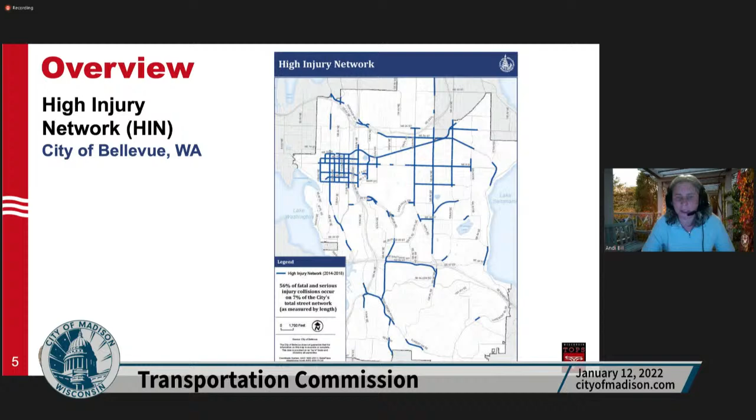There's another one, San Francisco, that looked at it. So with every great research project, we have to start with the literature review, right? We don't want to recreate the wheel. We want to make sure that we understand how the wheel has been working to this point, and if we need to improve upon it, or what we need to do with it.

So a lot of this work was just us analyzing what other areas were doing and seeing how we did it. One thing that San Francisco did was they combined intersections and segments together onto this map and looked at it.

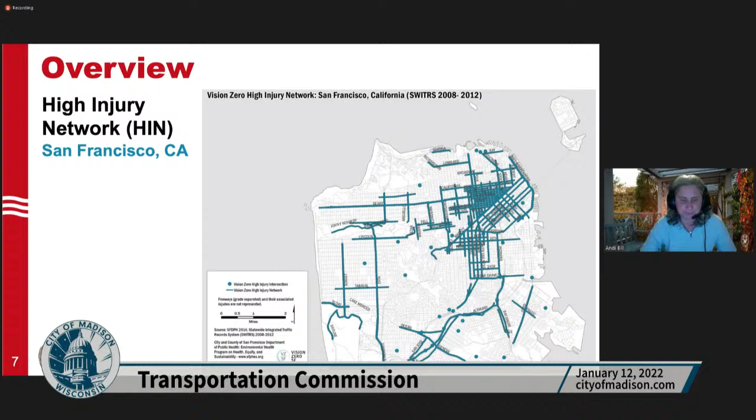As we think about our methodology, we couldn't have done this work without the City of Madison transportation staff helping us get the data. As always, your output is only as good as your input data, so we really wanted to make sure we had good data going into it. The City of Madison was amazing in getting us our network segmentations, which included over 4,500, almost 4,600 intersections, and 8,800 segments of roadway.

We also have our crash data collection. The Traffic Operations and Safety Laboratory houses the Wisconsin Department of Transportation crash database, so we have all crashes that occur within the state. We're obviously only looking at the City of Madison here, but the database goes back all the way to 1994. We looked at crash data collection for 2017 to 2019.

The intersections had a 250-foot buffer around them, just because sometimes how crash reports get filled out, the locations aren't always 100% correct. We kind of just move to different areas, so for the intersections we want to make sure we include a buffer around it.

For the segments, we looked at continuous mid-block roadway segments that are outside of that intersection buffer. So the roadway was either looked at as intersections or segments, and then we put the crash data on top of it.

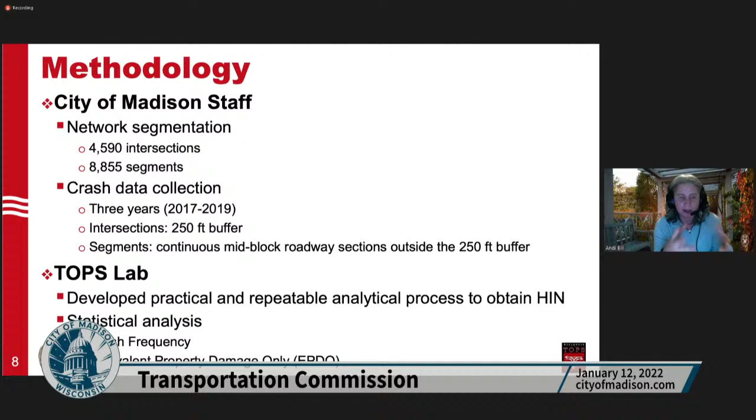As was mentioned, we wanted to make sure that we developed a practical and repeatable process to obtain the high injury network. It's no good to just have a network that sits on the shelf and doesn't get added to each year and looked at. So we took our time to develop this process in an Excel format and things of that sort, so that it can be handed over and done each year.

The statistical analysis has included crash frequency and what's called equivalent property damage only, and that's something I'll take a little bit of time to go into in our analysis.

At any point, if there are questions now or later, I can take them too. I'm kind of watching to see if there are hands that go up, but if someone else sees it, let me know. So you got to love a good graphic here.

Thinking about how we developed the City of Madison High Injury Network, we looked at our network segmentations. You can see the data elements we collected there in the yellow and green boxes. With that, we then added the crash data on that side, which is what I was talking about before.

We then looked at some crash frequencies, and our focus areas included all crashes, pedestrian and bicycle crashes or vulnerable road users, speed, alcohol, drugs, hit and run, and dark and light conditions—looking at whether it was lit or unlit, and different seasonalities with it.

We then take that crash frequency, and because we have a whole bunch of severities, we want to normalize those crash severities. So from there we go ahead and do what's called an equivalent property damage only. This normalizes it—it does weight the fatal and injury crashes up from the property damage only, but it gives everything one comparison value. I'll go into that in the next couple of slides.

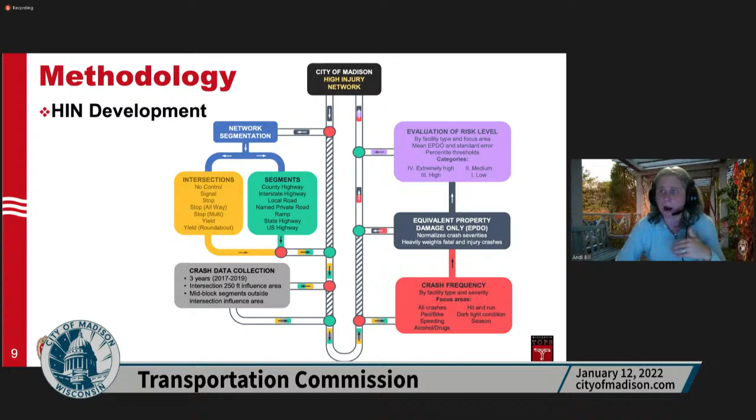From a crash frequency standpoint, we're just counting up the number of crashes over a period of analysis at our roadway facility—it's not normalized, just looking at that total number. For roadway segments, since the segments between our intersections can be various lengths, we normalize that to crashes per mile.

As we think about that EPDO, the equivalent property damage only factor, it uses a safety measure that allows fatal and injury crashes, which we're going to call KABC, because that's the injury severity used on our crash report forms. K stands for fatal, A stands for suspected serious injury, B is suspected minor injury, and C is possible injury.

And we normalize those to the property damage only crashes. So it's just a different way of normalizing it to make sure that we are including and really focusing on those fatal and high severity crashes.

We have a really neat way of thinking about things here in Wisconsin. We have what's called the CODES program, the Crash Outcome Data Evaluation Systems - because what would an engineer be without a couple more acronyms for you. We link our crash records to our hospital records, so we're actually able to get the crash costs of crashes here in Wisconsin. We're not using National Safety Council numbers or anything from a national standpoint - we're really using our Wisconsin numbers for that.

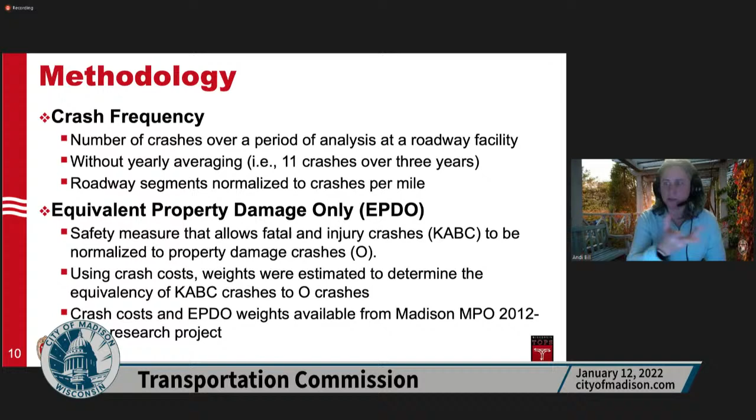So we did it by crash types. We looked at motor vehicles versus pedestrian crashes - those are called our PED crashes. We looked at motor vehicle to bicycle crashes - those are our bike crashes. And then our motor vehicle crashes, which could be a single vehicle or a multi-vehicle crash. So we broke it down into those three levels.

You can see the severity on the left-hand side of that table - that's coming from our law enforcement reported severity at the time of the crash. And then you can see the crash costs, which come from the hospital records, from that CODES data. What we do here is take this vehicle property damage only number, $24,322, and that's our base level, our 1. Then we take these other numbers and divide by that, and that gets us our weights on this side.

You might be looking at those weights and thinking, Andi, wait a second - how does a vehicle crash have a higher weight than ped and bike crashes? Unfortunately, some of this is that our vulnerable road users are going to sustain a very serious injury, or unfortunately a fatality, right at the scene of the crash. So they might not have those long-term hospital costs associated, as some of our motor vehicle fatality crashes do. That takes some of that into consideration, so it's sometimes a little hard to see those differences.

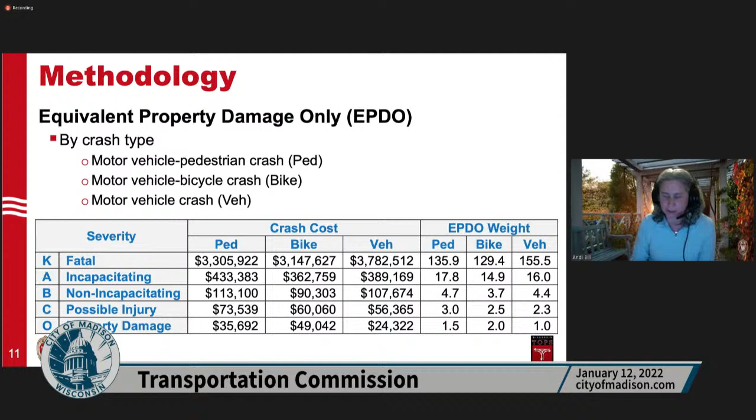This is just a way, instead of dealing with these large numbers for crash costs, of doing that weighting. So this is one example: one vehicle crash with an incapacitating injury is equivalent to what we call 16 vehicle crashes with property damage only. So one crash is equated to 16 of those property damage only crashes. Same thing with a PED with a fatal injury - it's equivalent to 136 vehicle crashes with property damage only. So that's kind of where those methodologies and weightings come from.

From here, and again I won't bore you guys with all the statistical models - if anybody wants to talk about them afterwards, Yang and Renee know how to get a hold of me. I love talking about statistical models, but I won't do that today during this meeting. We go through the models and then we come up with the network associated with it. This is an example of the bicycle crash - so we do a safety analysis of those intersections and segments based on those weights that we have.

So we're looking at those crashes, looking at what those weights would be, adding those weights to it. We looked at locations with an EPDO higher than a threshold, and what we picked for this one was a 65th percentile threshold. As you could see from some of the other jurisdictions that we did analysis with, anywhere from 50 to 85, and we picked 65, right in the middle.

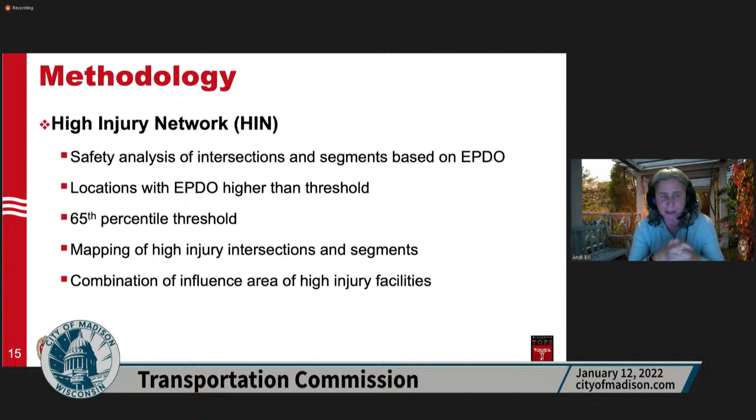Then we did a mapping of high injury intersections and segments, a combination of influence areas on the high injury facilities as well. So we did the analysis, and turned it back over to the City of Madison, which put together a beautiful draft high injury network map for us at this point in time.

I don't necessarily want to get into looking right at the details of each and every intersection at this point in time, but just wanted to walk you through our methodology. It's data driven, based on the literature that's out there. We really wanted to make sure we used a high statistical significance modeling standpoint that could be repeatable and used from year to year to come up with this high injury network.

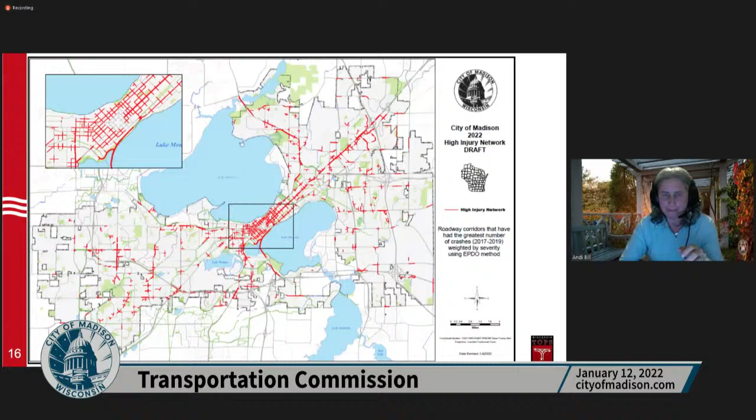Okay, what questions do you have for Andi or for Yang or Renee?

Harald, go ahead. Yeah, thanks for presenting this. As Yang said, we've seen this in various forms a couple of times, and so it's really nice to see how it has developed and get some of the methodological detail. So I do have some follow-up questions about these details. Let's maybe start with a straightforward one. So you say 65th percentile is the cutoff, the threshold that you picked, and that's the percentile of what?

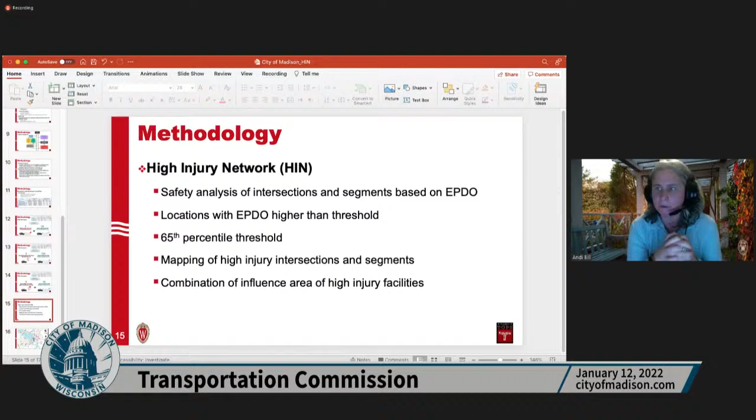Yeah, great question. So we looked at the network in general, and then looked to see the distribution of the weights for each of that network. And then we looked to say, okay, based on the weights, 65% of the segments were lower than that, and then we mapped the higher ones on that. So if you think about the distribution of the network with the different weights, we said, okay, let's look at the 65% and above to map it. Does that answer your question? So of any segment, no matter whether there was a crash there or not, right?

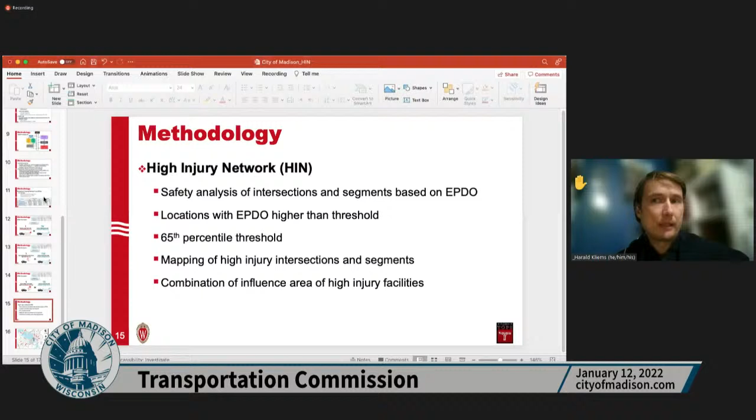Okay, thanks, that's helpful. So that leads me into the next question regarding the EPDO model. Can you say something about, it makes a lot of sense how that system works, that a property damage only crash, if you look at the multipliers, it's not terribly likely to show up on the high injury network map. But specifically, we talk about the high injury network and not the high crash network. So do you know if any locations that just have a high number of property damage only crashes actually made it into the map?

That's an excellent question, Harald, that I don't necessarily know off the top of my head, but I can look into it and then get some information back through Renee and Yang to you on that.

That's a great question. Because conceptually, I think I would be somewhat uncomfortable, because we've had discussions here at the Transportation Commission that certain treatments might lead to an increase in crashes, which might lead to an increase in property damage, but they prevent fatal and serious crashes, which is very much what Vision Zero is all about. I think ensuring that the methodology matches that approach would be really important.

Great point. Yeah, so we'll check and we'll get that information back to the group.

Okay, thanks. Maybe getting a little more specific, but related to my earlier questions. Looking at the map, I was wondering which intersections and segments show up there. For example, Mendota Drive, a low traffic road with generally low speed, still made that cutoff. So I went to Community Maps and looked up what that crash was, and it seems like it was an injury crash with a B level severity, which I guess is the second level, not incapacitating, but the one below. And that was the only crash at that intersection.

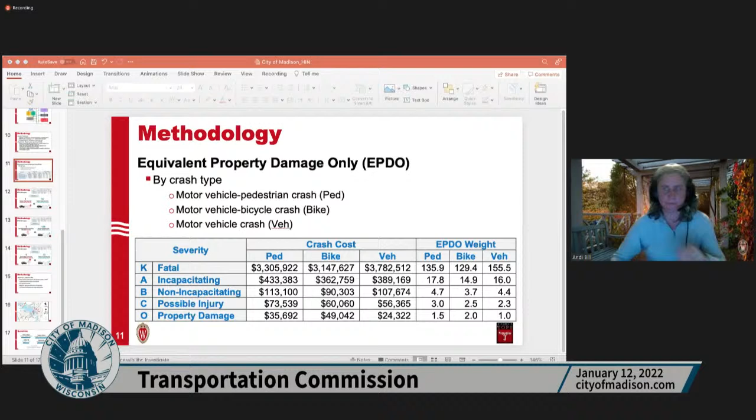Sure, and Yang, you can jump in too, but obviously we've been using the high injury network to help us with looking at project locations, and helping us as one of the data points in the Safe Streets Madison plan. We were using it previously for Vision Zero, and it's in the action plan to help us moving forward and making the best possible decisions.

Yeah, and I think that's partly why my question is going there. Does it make sense, for example, with Safe Streets Madison, to prioritize a project where there was a single crash over 3 years? Should that happen, because being on the high injury network gives your project a pretty high number of points, and I'm not feeling super comfortable with that.

Yeah, I just want to add that these are really good points. Our city isn't that big, but it's not that small either, and as Andi kind of presented, we have thousands of intersections and thousands of segments, so you're going to find some outliers that may not fit into any structure very well. That probably should be expected. Renee talked generally about how we use the tool, this is a tool that we use, so it's not everything we refer to when we prioritize our investments. With that said, this is going to be very valuable, so we can have some big picture ideas on the safety situations in the city, especially on fatalities and injuries, and the general idea on where we should focus our resources.

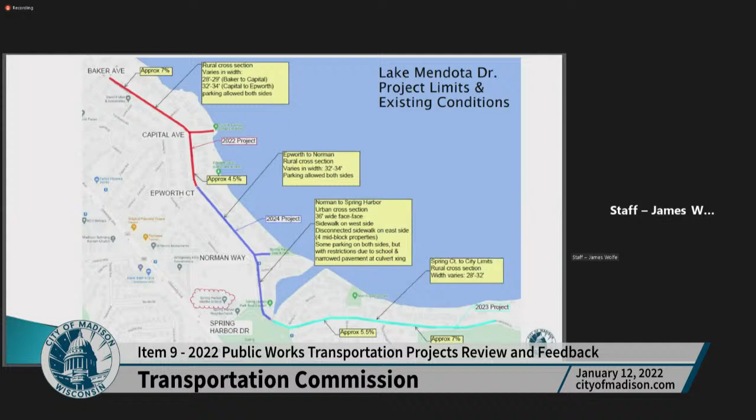For the most part, we do have parking allowed on both sides of the street. There is some parking restrictions around the school and through this area where the pavement narrows a little bit for the culvert crossing. I also noted a couple of the steeper portions.

There's a high point around Merrill Springs here, 7% grade, and a 5.5% grade coming down towards Spring Harbor. And then up on the westerly end, a 7% grade and 4.5% grade here, kind of in the middle near Epworth Court.

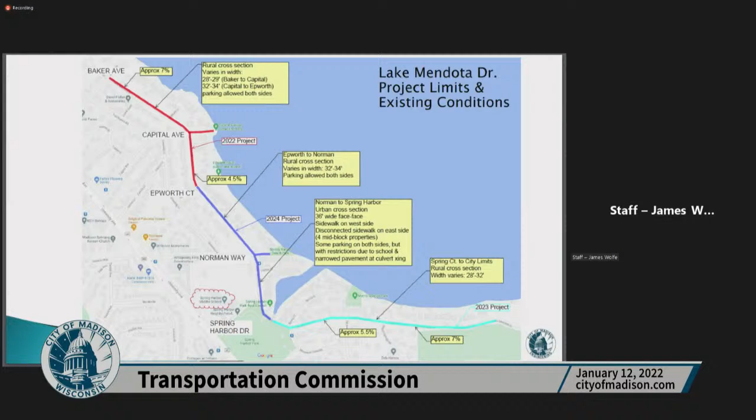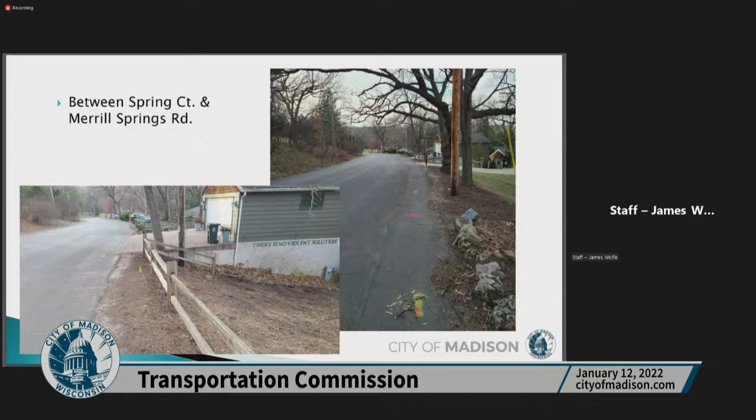And then here's the easternmost portion. It's tough to see, but you can kind of see there's a little wall that goes along this driveway, and it kind of dives down from the pavement edge. And this driveway is also fairly steep. I think this is at about 15% coming up from the roadway. Wooded area on the right side.

You can see some of the off-street parking areas that have kind of been created along with Lake Mendota Drive on this stretch, and some pretty lovely pavement here right in the center.

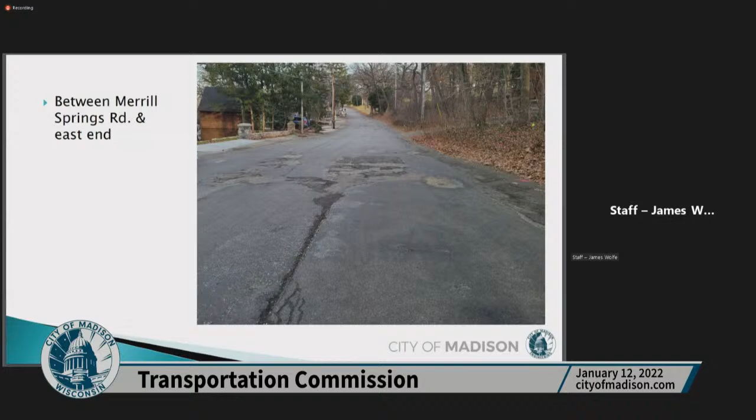So a little bit of information. I'm actually going to provide an updated slide here. The one that was attached is based on our tube counts for the traffic volumes and speed data.

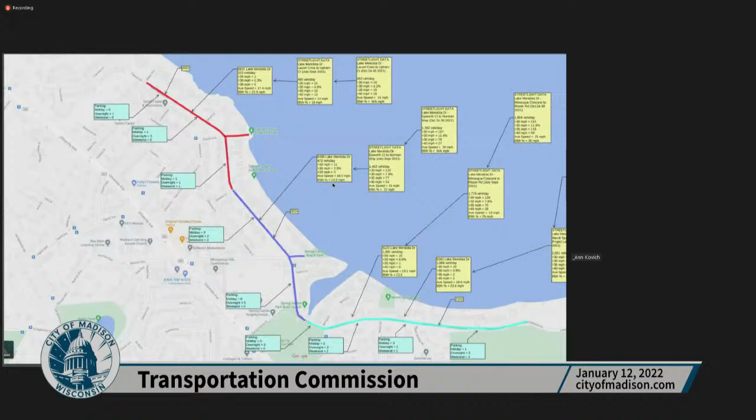Hopefully I don't lose you. One quick sec. Of course, my Zoom is blocking. Here we go. You still seeing my screen? Yes. Okay, great. So I'm going to zoom in, hopefully, on some of these. It's not letting me, unfortunately.

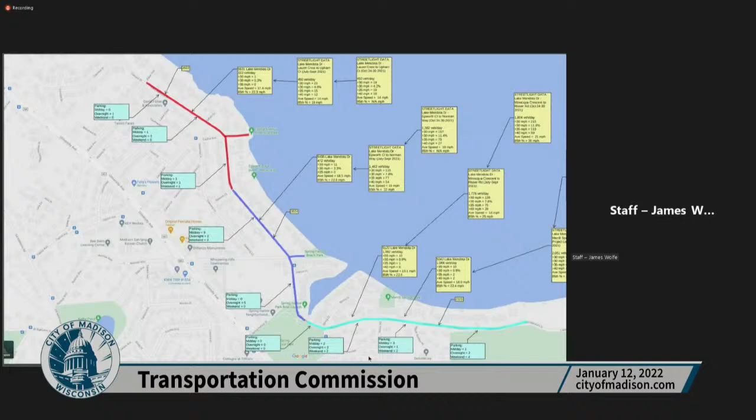But on the westerly end, so that we have some parking data in blue, where I'm going to try to bring this in, find another one. Here we go. So we have collected some parking data along Lake Mendota Drive. This was done over weekdays, daytime, evening time, and nighttime.

In general, we found pretty low utilization, maybe around 10% or so of the available on-street parking out there.

The volume and speed data that we've noted here - this first box is what was attached initially, and we've researched a little bit more data out of Streetlight this afternoon right before the meeting. Unfortunately, we weren't able to get that in there quick enough, but I still wanted that available tonight. On the westerly end, this is the lowest volume area.

Our tube counts had about 323 vehicles with average speed 17 miles per hour, 85th percentile 22. The streetlight data actually had a fair bit more traffic volume, up to 450, and a fair number of higher speeds out here too. We think this is probably a little bit more consistent with what we've heard from the neighborhood in terms of some of the concerns about speeds out here too.

The middle section, we had counted 472 vehicles. The streetlight data had considerably more, up to maybe around 1,400 or so. Similarly, the streetlight data had reported higher speeds in this area too. We had noted about 2.3% over 30 miles per hour, but the streetlight data was looking at closer to 7%. And during the fall, this was the same week that we had collected our speed data - they had about 11% actually.

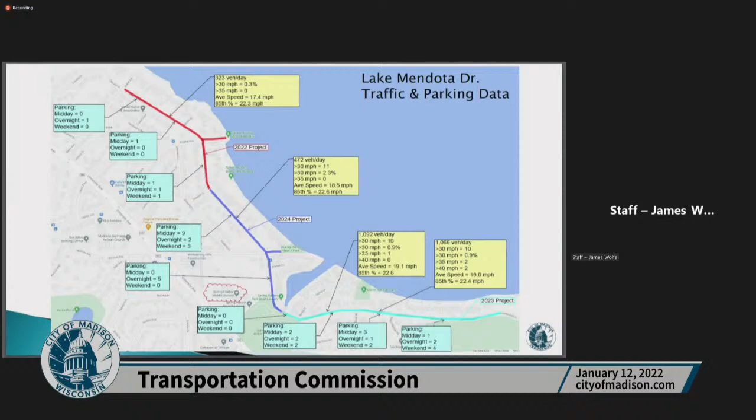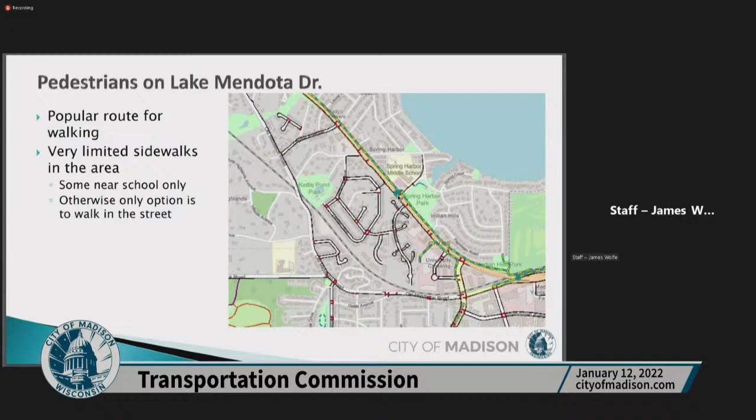Just a quick overview of pedestrians on Lake Mendota Drive. Like I mentioned earlier, there are very limited sidewalks in the area. We have the multi-use path along University Avenue, but in general, everything on the north side here has no sidewalks. South of University Avenue, we do have sidewalks - all these black lines scattered throughout the neighborhood. And I think you've already heard about a future underpass of the railroad at Old Middleton and Craig, and there is an existing underpass at University Avenue at Spring Harbor right here.

So our initial design concepts - this is why we're coming to the commission tonight - is to get some initial input as we start to put together our preliminary designs. We do think there is some flexibility to potentially narrow the street a bit. It is pretty variable and does seem pretty wide in some areas, especially in locations where there have been some extra paving or street use for on/off-street parking. Narrowing the street would provide some additional space to hopefully provide sidewalks in this area.

The eastern portion, from about Spring Harbor to the city village limits, is noted in the comprehensive plan as a tier 1 sidewalk need. But with some of the connections that Lake Mendota Drive provides to the school, overall pedestrian network connections, and some of the parks in the area too, we think it would be a good idea to propose a project that included sidewalks along Lake Mendota Drive also, to provide that all ages and abilities type pedestrian facility here too.

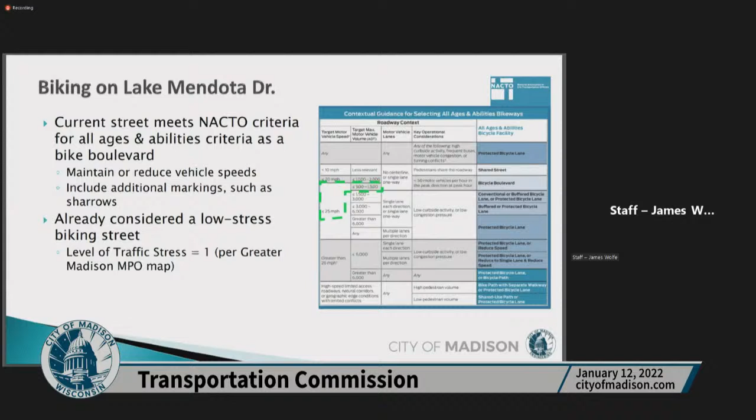With some of the input we've received from the neighborhood, we would also consider some traffic calming measures to help keep speeds down, especially in light of that streetlight data, where it does indicate there seems to be a little bit more of a speeding issue out there than the city collected data first.

Jim, did you want to advance your slide?

I think you might be talking about the last slide. Are you seeing it? We are now. I was looking at it on my screen, but apparently it was.

We do think that with how poor the pavement is out there in some areas, that's probably helping to keep speeds down to a certain extent. If we reconstruct this street and provide a new paving surface, we could see speeds increase a little bit out there potentially. I did note already that one concept would be to install and extend sidewalks to the extent possible, noting that we have some topography challenges in a lot of areas, and we would certainly hope to protect a lot of that tree canopy that's out there.

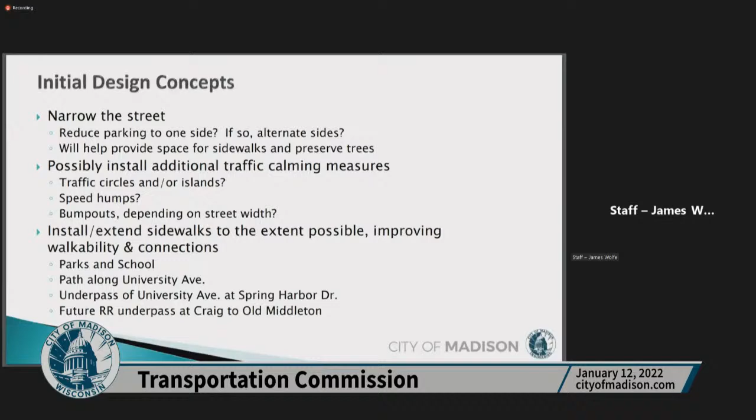While we do have additional right-of-way space that goes beyond what's out there for the pavement surface on Lake Mendota Drive right now, not all of that would be fully utilized if we are protecting some of those trees and taking into consideration some of the grade issues there as well. I think that is my entire presentation.

So what you're really looking for from the commission, just to clarify, is initial input for these preliminary designs. Is that correct, Jim? Correct. We're looking to collect some input from the neighborhood. We had a public meeting last night, and we've put out a survey where we've gotten some input on this. We'd also like the commission's thoughts as we prepare a preliminary design, especially on the idea of narrowing the street a bit and including sidewalks as key factors, and get thoughts on what potential traffic calming measures we should focus on out here.

Okay, Joe, could you ask if we have anyone from the public here to speak on Lake Mendota Drive? If so, we'll hear from them now. First up, we have Faith Fitzpatrick, who lives on Spring Court in Madison. Go ahead, Faith, you have 3 minutes. Okay, thank you.

I think these comments are fitting for this initial design. This is the first time I've attended a Transportation Commission meeting. I was at the public meeting last night as well. I wanted to give a little context for this stretch of Lake Mendota Drive that has reconstruction plans in the works. It was not only part of the historic Park and Pleasure Drive, but it was also the destination point, and we are lucky to still have glimpses of why it was that.

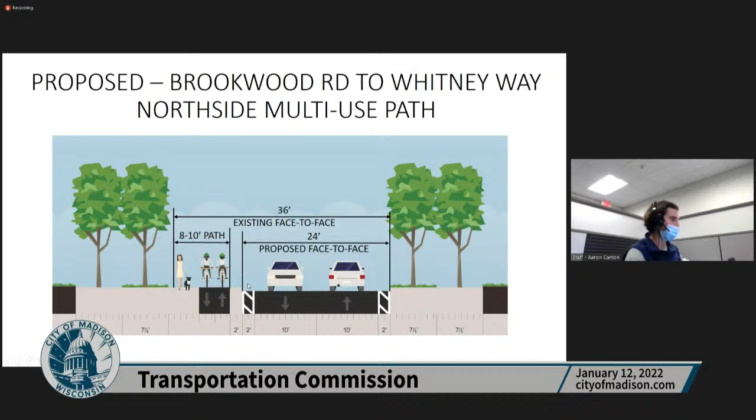So with that in mind, we also looked at an alternative where we would remove parking on both sides, bring in the curb line on the north side, and construct an off-street multi-use path that would ideally be 10 feet, but potentially vary between 8 and 10 feet. There would be a small terrace in between the path and the street, but this would be plowed and maintained by the city, so the city would be able to handle snow removal even with a narrower terrace. We would certainly work to keep as wide a terrace as possible while also minimizing our impacts to the trees and grading on either side.

We, after reviewing, believe this is our preferred cross-section due to the fact that there would be no additional assessments for sidewalk. There would still be assessments for utility work and some street infrastructure, but none for sidewalk. The path would be paid for and maintained by the city.

So with that, we can also look at the next larger section of Hammersley, from Whitney Way to the Beltline. Here's the existing cross-section, a little bit wider here, 40 feet from face of curb to face of curb, two-way traffic, parking only on the north side, and on-street bike lanes both directions, with a little narrower bike lane on the southerly side.

Again, large canopy on either side of the street, directly behind the curb, with some stretches with steep side slopes. So again, we're trying to stay within this existing 40-foot width over this stretch.

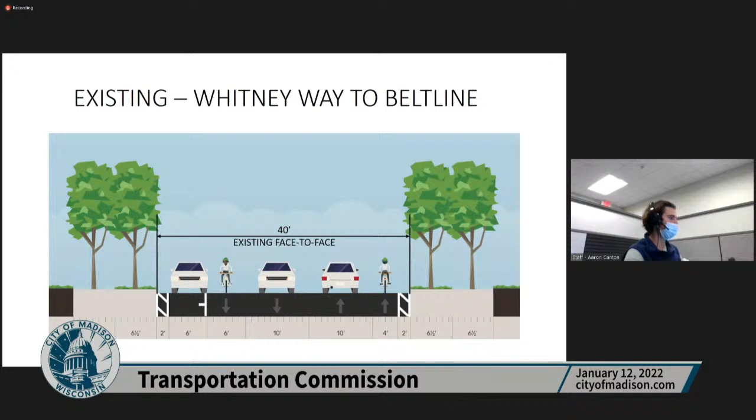Similarly to the other section, we looked at removing parking and putting in sidewalk directly behind the curb, for similar reasons. This doesn't leave any terrace space for snow removal.

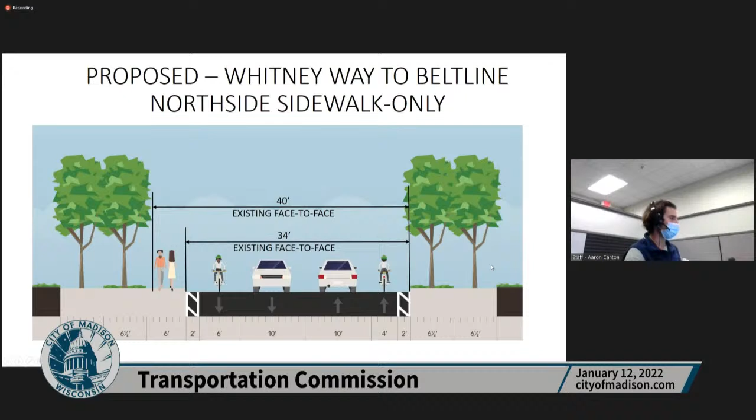So with that, the city staff preferred alternative would be to remove all on-street parking and bike lanes over this stretch of Hammersley, happening over the next two years with two projects, and constructing this off-street multi-use path, which would accommodate pedestrian facilities, which there are none whatsoever.

And I can tell you from being out there, as many of you are aware, a lot of people do walk within the street, either in the parking lane or in the bike lane, because you don't really even have the opportunity to walk behind the curb, given the trees and steep side slopes. So in continuation to the sidewalk conversations from before, there's definitely a strong need for it.

In addition, this would also accommodate bicyclists throughout this whole stretch, as they're currently only accommodated from Whitney to the Beltline.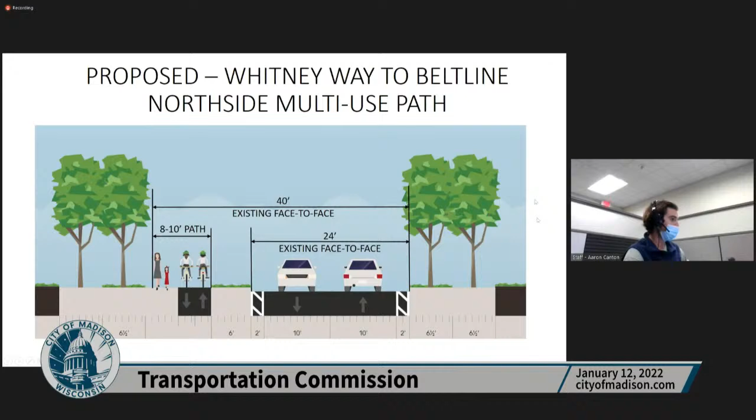One thing I did want to point out that would be tricky but certainly doable is figuring out a good crossing at the Whitney Way and Hammersley intersection. Currently it's a tricky crossing, only for pedestrians, quite a long way to go, and sort of confusing. So that's something we'll have to look at with traffic engineering, and we'd appreciate any input this commission has on the matter.

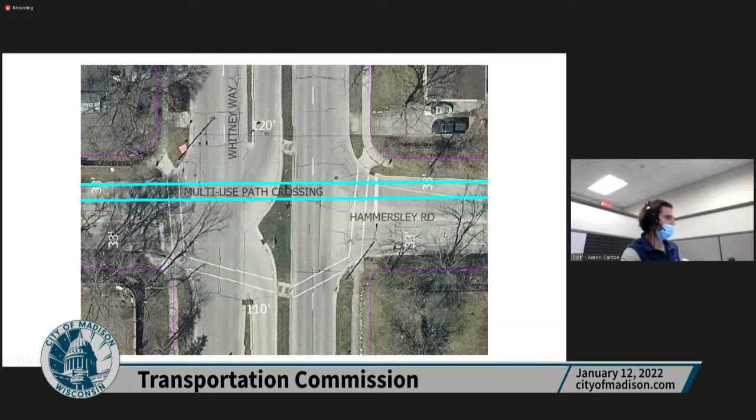Also, existing speed limits on Hammersley west of Whitney are 25 miles an hour, and east of Whitney, from Whitney to the frontage road, it's 30 miles an hour.

Again, I'll just reiterate that we are coming here preliminarily to get your input, and then we'll go to the public soon, with a public meeting scheduled for early February, along with public meetings and a project survey to gather input, before coming back to this commission for more formal approval at a later date. And with that, that's the end of my presentation.

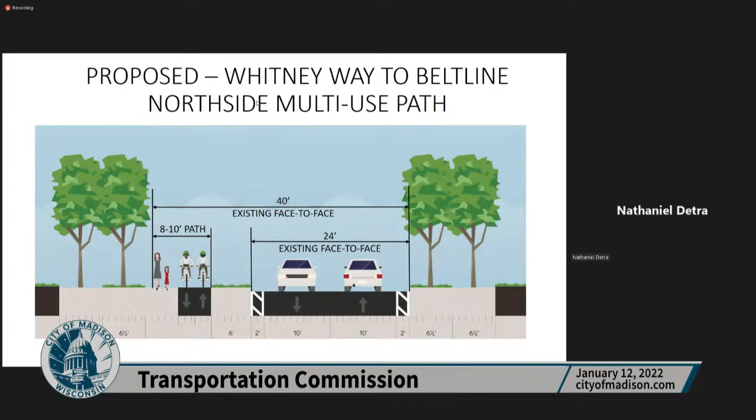One thing I don't know that I heard from Aaron in the presentation, but I think this is a strong point in support of the multi-use path: on the eastern side of this stretch of Hammersley, it connects up to the Southwest Commuter Path. That is a really good multi-use path that tons of people use, connecting to the Capital City Trail and other important multi-use paths in the area.

So having a multi-use path that connects to Southwest Commuter, I think, is really valuable because it'll connect folks along this corridor to a low-stress way to get onto that path. And from there you can get to so many places in town. So that's all, I'll be done now.

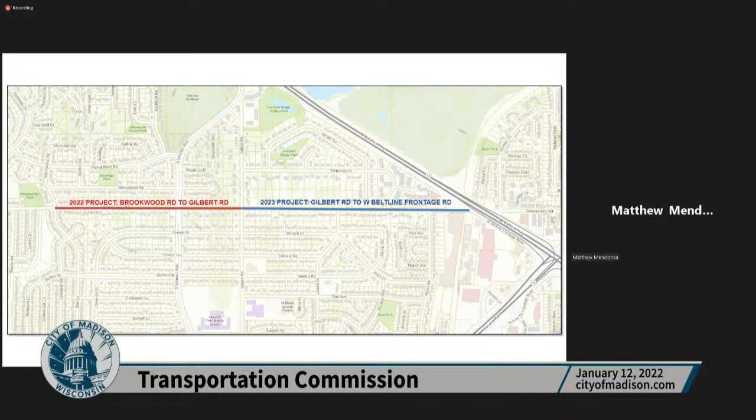Aaron, I believe you have something scheduled, is that correct? Yep, I can respond to that. I apologize for any confusion we've caused in the order of this, but we are absolutely intending to do a full slew of public engagement, planning to send out a mailing for a public meeting notice that will be held at the beginning of February, as well as a project survey you can fill out and provide input on all facets of the project. The purpose of this presentation to the commission was to gain early preliminary feedback to see if we wanted to do something beyond a typical resurfacing project where we would get in, get out, replace utilities and street infrastructure as needed. But given the sidewalk need and lack of facilities, we were looking at doing something additional and wanted the commission's feedback before going to the public with proposals. I apologize for any confusion, but there will certainly be the typical and extensive public process with this project as with any others.

And then it'll come back to TC, correct, Aaron? Yes, it'll come back to TC for a formal approval once the public has weighed in. Thank you for that clarification. Alder Harrington McKinney, did you have anything further? No, thank you very much for that response. That clears it up, that there will be an opportunity for community members to have input, so there's no decision already made, and you'll incorporate what can be incorporated, but this will come back to our body for a final vote. So yes, that answers my question. Thank you. You bet. Okay, any other questions from the commissioners?

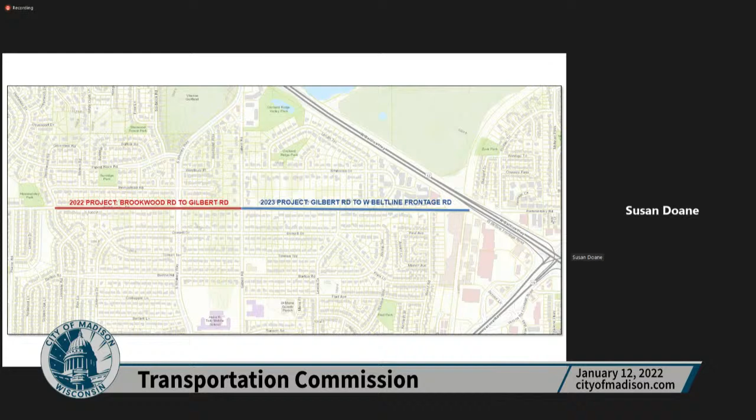Okay, well, I've lived on Hammersley Road for more than 20 years, and I have walked Hammersley Road twice a day, every day, with my dogs, and it is kind of unsafe. I agree with the multi-use lane on the street, because I understand from what Aaron says that it's going to be just abut where the curb is now, is that correct? And so it won't take down the trees or anything beautiful on our street. We did try a traffic calming measure, which was the islands, which I was in favor of, and they could have worked, except what happened was there was parking, and so cars would park in that lane, and then also the walking lane did not go where the islands were.

So there was just a crunch where the islands were, where people were supposed to walk. Cars couldn't park there, people were supposed to walk, and the traffic, and that's really dangerous. So I would support no parking on the street, because people have huge driveways, so you don't really need to park on the street. And the multi-use lane would be a really good idea. I don't know why you chose the north side of the street to do this, because there's just all those big downturns of the land. And I do agree with Matthew, who said the assessments for the sidewalks, because the lots are so big on this street, it would just be horrible to think about. And shoveling, because I'm an old lady and I can barely shovel my driveway. Having to shovel a double lot would really be hard for me. That's my self-interest. So I support the multi-use lane, the no parking, and not taking down any trees to do any of this work. That would be my preference as a homeowner on Hammersley Road. That's all I have to say.

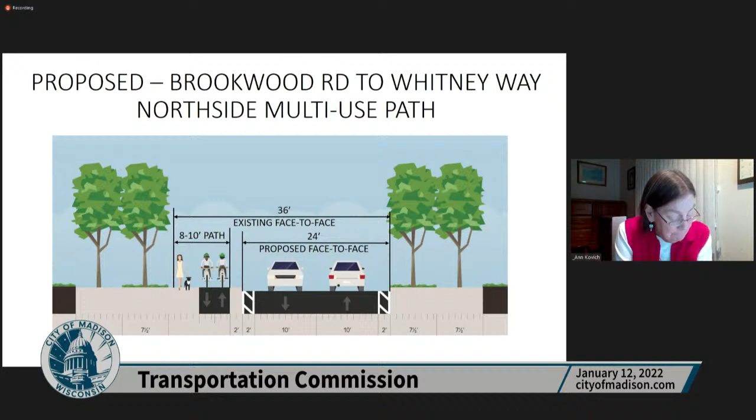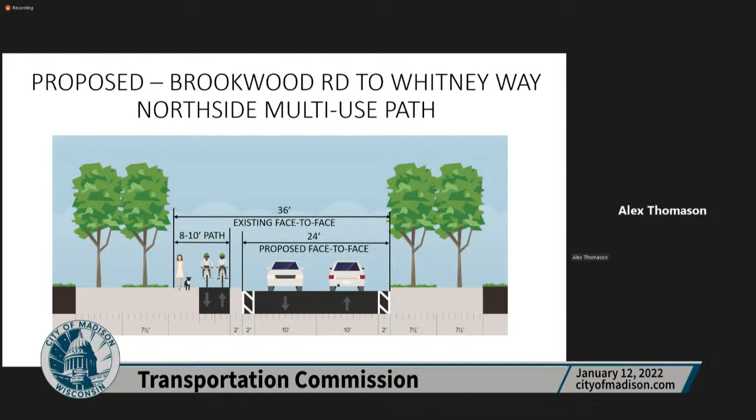I live on Jacobs Way, a bit further down on Hammersley, just about on the edge of the map within the PowerPoint presentation. I wanted to voice my support for the multi-use path along the north side of Hammersley between Brookwood and Gilbert, and also for making the path's maximum proposed width 10 feet.

I think anything less than that puts cyclists and pedestrians in an awkward position where they have to negotiate, and you run the risk of bumping into each other.

The lack of pedestrian and bike infrastructure in the east-west streets between Hempstead and Russet has really always surprised me. If you look at a map, or at OpenStreetMap, essentially every road between those two roads has no sidewalk, cutting off the neighborhood to the west from the neighborhood to the east. I think this plan is a great solution to connect the two neighborhoods.

My kids have friends that live in the Teresa Terrace and Hammersley neighborhood who attend Toki Middle School, and they really have zero options for a low-stress route to school. There's no bike path, no sidewalk, no good crossing of Whitney Way, and all of that puts them in a situation where they have to take the bus, even though walking it is less than a mile.

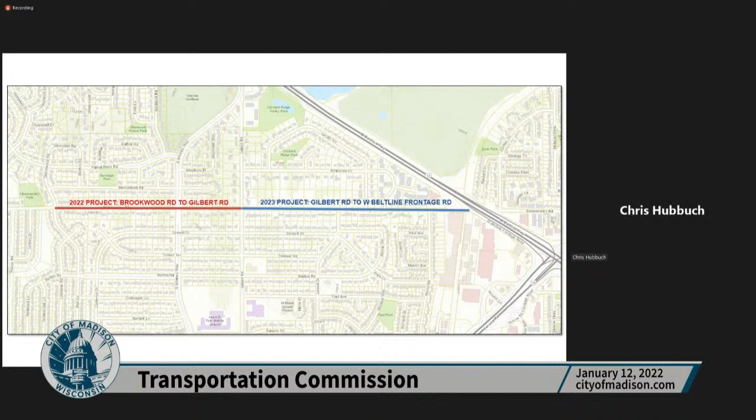They use the current bike lane as a passing lane. This is an improvement that would make this neighborhood eminently more livable. So glad to pay the assessment. Please put a sidewalk, put a bike path wherever it needs to go. That's all I have to say.

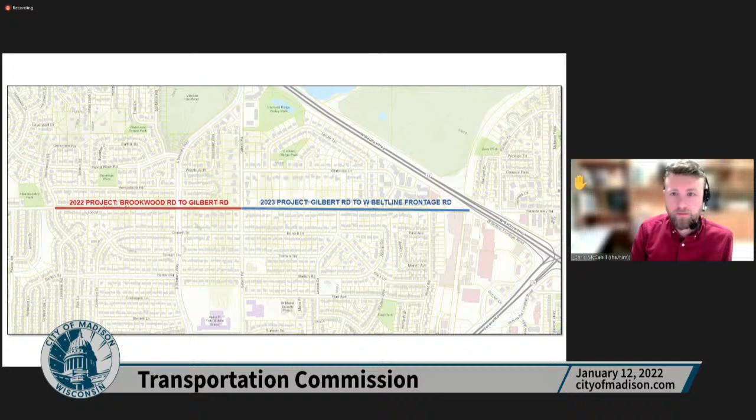I think this multi-use path option looks great. I'll flag a couple things I'd be looking for. One, that Bill mentioned, is the crossing at Whitney Way. I'm concerned about bikes coming from a direction that a turning driver wouldn't expect, so I think we'll probably need to see a couple options of how to make that work. One that comes to mind might be to move the crossing north a little bit away from the intersection. I'm not sure what the pros and cons would be without seeing it drawn out, but that's one idea.

The other downside, I think, to the multi-use path on one side, from my perspective, would be that folks are going to be accessing the path along the route, including from the south side, since there are a lot of houses here. If there are ways to make that less awkward, I don't know if there's precedent for some sort of curb cut where there's a driveway on the south side. That would be great to see. But other than that, thanks for the work.

Before you go, were you in favor of a 10-foot multi-use path versus 8? Yeah. I guess I'm sort of indifferent, but yeah, they both look great. Okay, I just wanted to clarify.

Denise, you're next. Thanks, Dan. First, I just really want to commend Aaron and city engineering. This is a really creative idea. Having been in that neighborhood to visit folks, it's a gorgeous neighborhood, and the multi-use path still kind of feels like it has the vibe of the neighborhood.

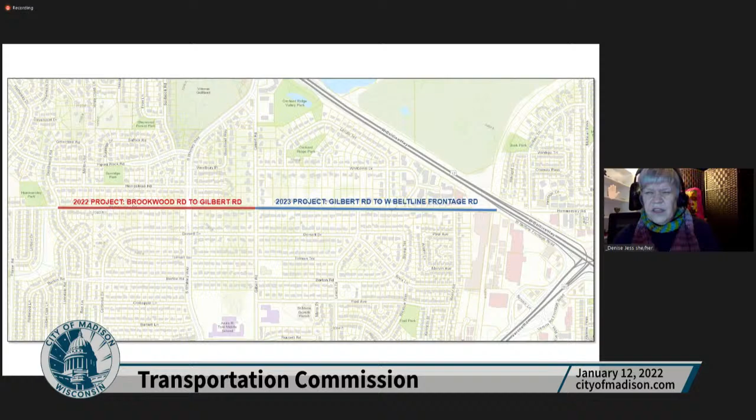Thank you, Denise. Alder Figueroa Cole, go ahead.

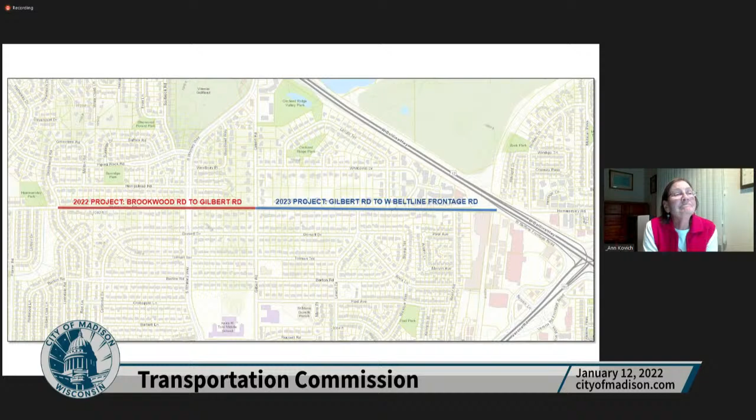Thank you. So I am the alder for this part of this project for District 10, and I actually thank you, Bill, for sharing your perspective on that discussion you have with the Neighborhood Association. It kind of threw me off a little bit with the feedback received on that regard. So I am glad that I am in total agreement with you on your statement. I don't have much more to add to it.

With the things that the people who have spoken before me presented, I think it's a very creative way to tackle this road. I've been out there for a short time, and Hammersley is one area that is a constant issue, especially with safety and speeding. I actually texted Jason at the Midtown District to make sure MPD is aware of this project, so they can provide input or comments. Their feedback will be valuable, because it's a road we are constantly back and forth on trying to figure out how to make it safer.

I also want to point out that moving forward with this project, and with the prior project you guys were discussing, sends a signal to the community that we are indeed 100% in support of the initiatives of Safe Streets and Vision Zero. I get that this project started with the need for utility updates, but I am so pleased to see staff really taking the opportunity to expand that, to have a cohesive plan, and to work collaboratively to make sure the vision of those other projects is also part of these particular projects.

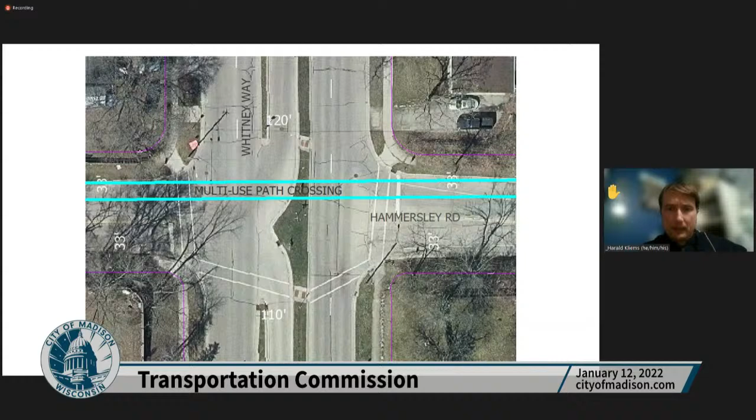Then on the western end, is there any vision for going farther west? Is the idea - and this maybe ties into the north side versus south side question - is there any potential in future projects to extend the path? I think in terms of the bike network, you can think about, you can turn right on Brookwood and get over there.

Eventually, it would be great if there were one continuous path getting you all the way to McKenna and Elver Park in one go. So I'm curious if there's any plan or thought for extending that in the future, and would it be easier to do that on the north and south? And one final question: is there a city policy that if it's a multi-use path, the city is responsible for maintaining it? It seems great for diffusing neighborhood opposition since people don't want to pay for it, but I want to make sure that's handled consistently across all facilities citywide to keep it equitable.

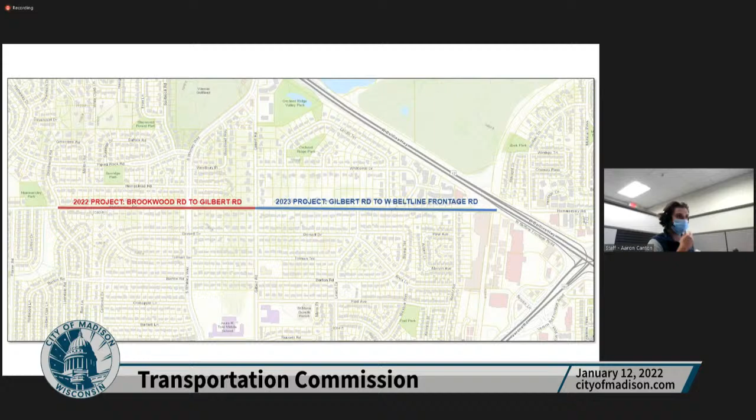Can you answer that? Yeah, I can answer that. First off, regarding extending some sort of off-street multi-use path beyond the Brookwood western limits to Elver Park, McKenna Boulevard, that's definitely something we've talked about and will look at when setting up this design, making sure we set ourselves up as best we can for something extending west in the future. At this time I'm not aware of any specific plans for that extension, but we'll certainly consider it. I think it would be super well served, and if this path were to go in, it might make that come a little faster too.

Regarding the policy question, I would resort to Christy Bachmann if she's on the call. I just want to make sure I get it right. I'm not sure if Christy is here. Yeah, Christy's here. Do you know the answer to that, Christy? Could you restate the question for me, please?

So it seems like the idea is that if a multi-use path or whatever we call it goes in there, the city would be maintaining it. So I'm wondering, what is the policy? When does a property owner need to maintain a sidewalk or widened sidewalk or multi-use path versus the city?

So we only have a handful of multi-use paths adjacent to the roadway in the normal spot of a sidewalk, and in all those instances the city maintains them. Offhand, I'm thinking University Avenue, Johnson Street, and what's proposed here. Whenever it's a multi-use path, usually 10 feet wide and asphalt, the city goes ahead and pays for the installation and also maintains and removes snow during the winter time. Sidewalks are the responsibility of the adjacent property owner to remove snow, and of course if it's a city frontage like a park or storm sewer parcel, we take care of those. Thank you.

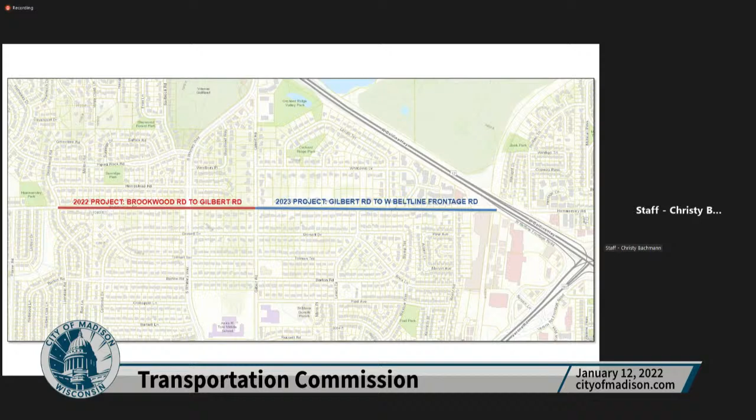Okay, other comments from the commission or other alders who are here? Aaron, do you have what you need? Yeah, absolutely. This has been really fantastic feedback, and I look forward to taking this back to the drawing board and then presenting to the public, getting that feedback, and bringing it back to you all. Thank you, and we appreciate you coming before us twice: once to hear from us on a preliminary basis and give us an opportunity to offer that feedback, and it also gives the public an extra opportunity for feedback as well. So thank you very much, Aaron.

So next we have John Nolen Drive. Can I just check in with you, Joe and Aiden? So all of the members of the public have had an opportunity to speak, so we have nobody else waiting, correct? That's correct. Okay, great. So next we have John Nolen Drive. So who's going to handle that from staff? I can handle that one.

This is Chris Petykowski with City Engineering, and I'm going to share my screen here. All right, is everyone seeing that? Yes, we are.

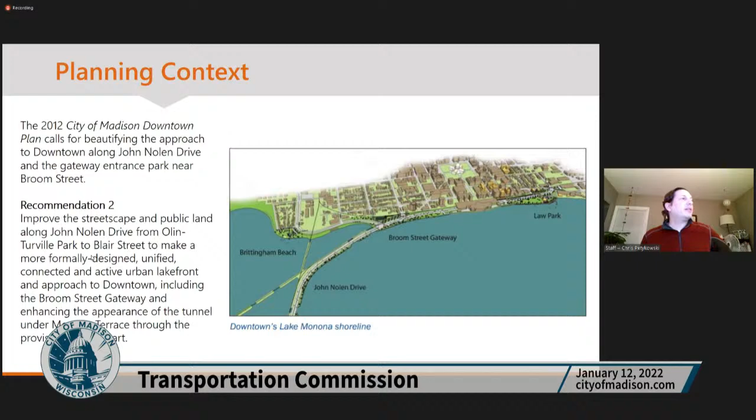Just a little bit of planning context for the project. The downtown plan touched a little bit on John Nolen Drive, including recommendations about improving the streetscape and kind of beautifying the approach to the downtown. So we'll definitely be taking those plan recommendations into account with the project.

As far as project needs and why we're doing this, there's a number of reasons. One of which is pavement condition. As with most street projects, the reason we get them on the list is because the pavement is starting to get a little rough, and that is true on John Nolen Drive. Although I would say it's probably not the highest driver. The bridges are actually our highest driver of the project.

The bridges are at a point in their lives where we need to plan for the reconstruction of them. The southbound ones are about 60 years old, and the northbound ones are about 50 years old now, and they're showing a little bit of wear. The bridge decks - you can see here the joints on the bridges are constant maintenance issues for us to go out there and repair as these plates come loose.

You can see some of the concrete's falling away on some of the girders. One of the biggest things going on out there is some of the movement that happens with the way the bridge was built adjacent to the railroad. It was built after the railroad - the railroad was there first, the railroad causeway. So it was an additional set of fill on top of a slope, and things have moved and shifted out there over the years. You can see in this case that these girders used to be in the middle of their piers, and now you can see they are not. So in fact, we had to install a bracket on this one to make sure the girders are still supported well. So things are moving horizontally out there.

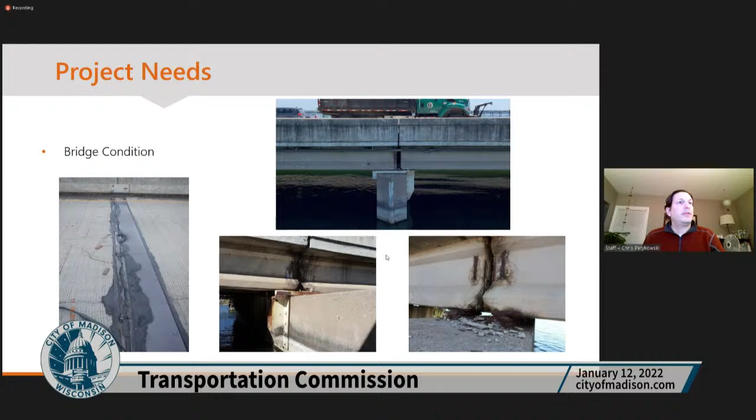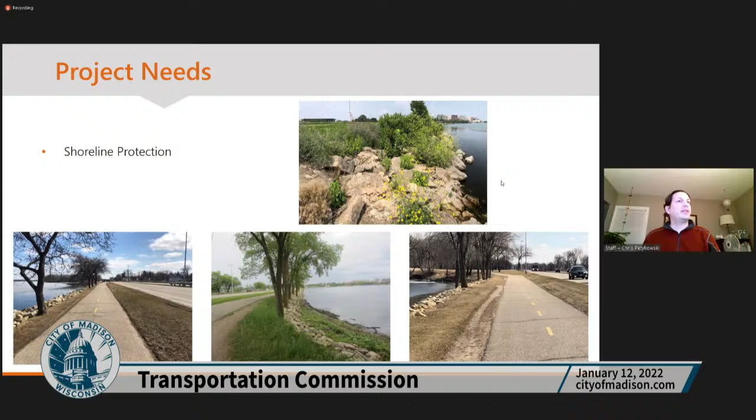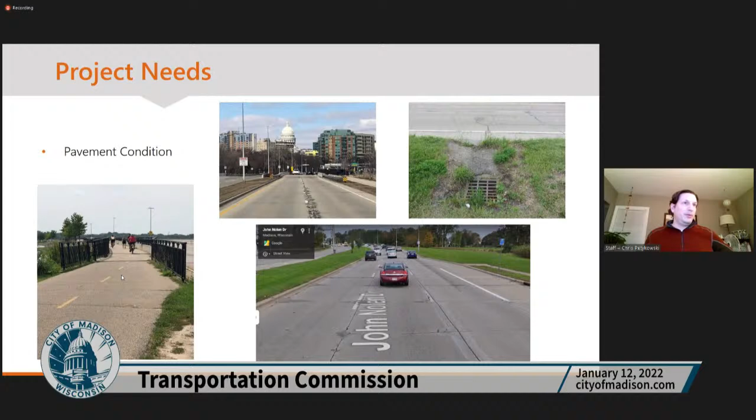Shoreline protection - while we were out there, we planned to repair the shoreline as well. And I didn't mention before, on these pavement conditions, one of the big things is our multi-use path on the bridges - the constriction here, where the multi-use path shrinks down to 8 feet from wall to railing. So it's really a tight cross section there, and as we mentioned before, it's so highly used, so we know that needs to be wider.

We'll be looking at safety and crash issues. It does exist on the high injury network, so we'll be looking at different ways to improve upon that, and also look at improving crossings and try to lower speeds, creating more of an urban street environment versus the highway kind of feel.

Some of the goals out there - I mentioned some of these already a little bit, the project challenges. We have the causeway movement and settling. We are working together with Madison Parks Department, who is undergoing a lakefront master plan that encompasses this area, so we'll be working together on that. Also, as usual, working with Madison Metro, looking at our stormwater quality and any abilities to do improvements there. Coordination with the railroad, coordinating with the parks and public space.

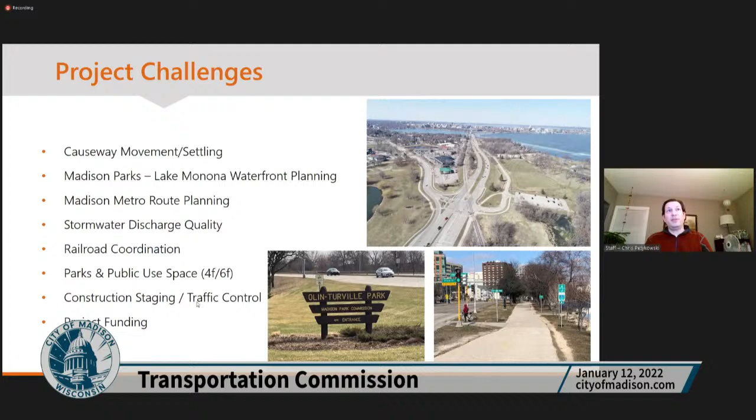Construction staging and traffic control will be a big issue out here. There's 45,000 cars a day that we're working with, so this is a big issue. And project funding is a challenge as well. If the project is big with that many bridges and structures, it's difficult to fund.

So what are we doing? We're going to be doing a full reconstruction of the street, including improvements to the roadway, bridges, intersections, multi-use path, and shoreline protection. The limits right now, as we speak, are from North Shore Drive down to Olin Avenue, and these are the portions of the street that are under city ownership.

To the north is 151, so we would be working with the state on any improvements there. And then to the south is county highway controlled, so we'd have to work with the county on that. The stretch in red is the portion the city does control on its own.

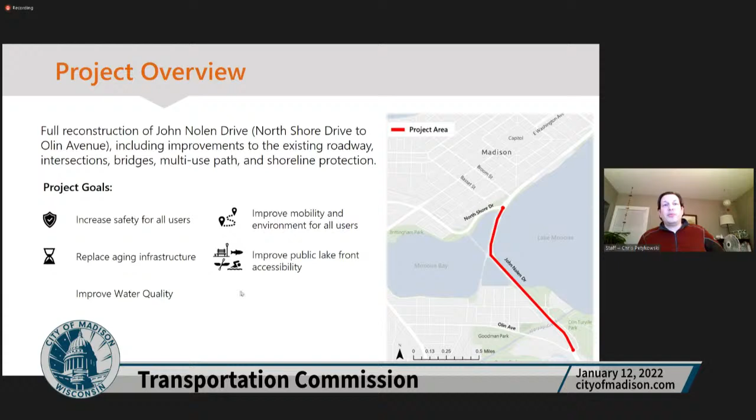We have established some of these goals here: increasing safety for users, improve mobility environment, obviously replace the aging infrastructure, improve public lakefront accessibility, and improve water quality to the extent possible.

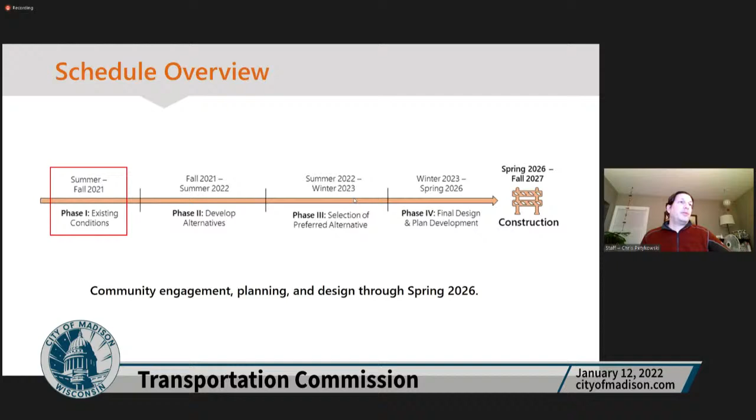Right now, as I mentioned, we're very early on in the process. We expect a multi-year development of the project, and then construction in '26 and '27. So these first years we'll be kind of working with community engagement planning, and also working with the Parks Department and their master plan to coordinate any activities there, and then getting more into selection of preferred alternatives and final design in the later years.

As far as public engagement, we are trying a little bit more of a robust process than even normal, which I consider is pretty robust on its own. But trying to look at a number of different ways to get input besides just our typical PIMs, and try to gather community input from a bunch of diverse perspectives.

Some of the things we've done so far: a project flyer, project website. We've had some tabling at community events, so actually going out into events and talking to folks. We did a SurveyMonkey online survey to get inputs. We've been working on different language flyers, and of course we've got our email system and website.

Some of the things we've heard at the public information meetings so far - we did have one meeting so far - some of the things they valued most was the water, obviously, commuting - it's obviously a very convenient commuting route - and the multi-use path, people love, obviously, for good reason.

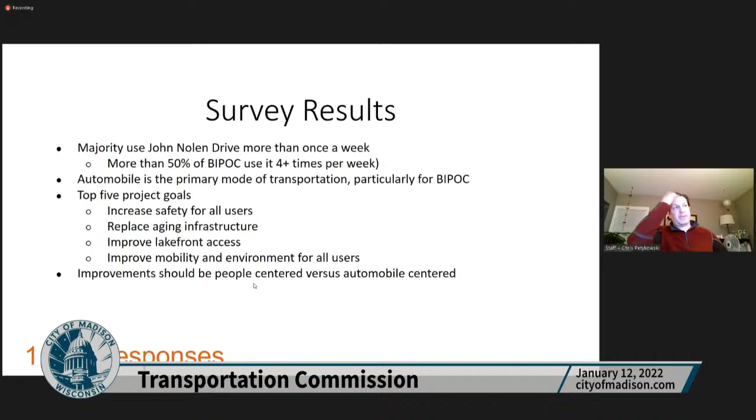Some of the goals that they valued the most was increasing safety, replacing aging infrastructure. Improvements should be people-centered versus automobile-centered, so again kind of trying to focus on that, more like a ped bike perspective than throughput, car throughput.

Some of the open-ended questions we asked folks about - some of the common things we're hearing again: widen the multi-use path, separate the pedestrians and bikes, intersection and crossing improvements, physical changes like barriers or speed limit reductions, fix the pavement, again increase the width and separate peds and bikes. Those are separate peds and bikes, I think, are something I've heard the most in this process.

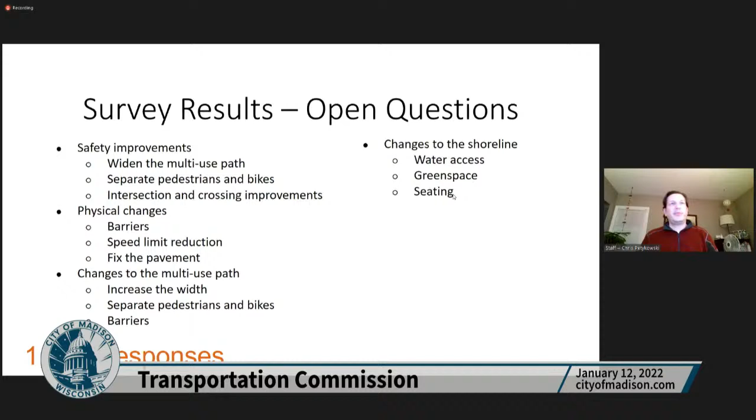As far as the shoreline, kind of looking at ideas to try to get more access. So right now, there's a multi-use path, and then there's kind of a rock barrier. So maybe there's some other ways where we can provide better access down to the water. Some seating, perhaps, along the stretch.

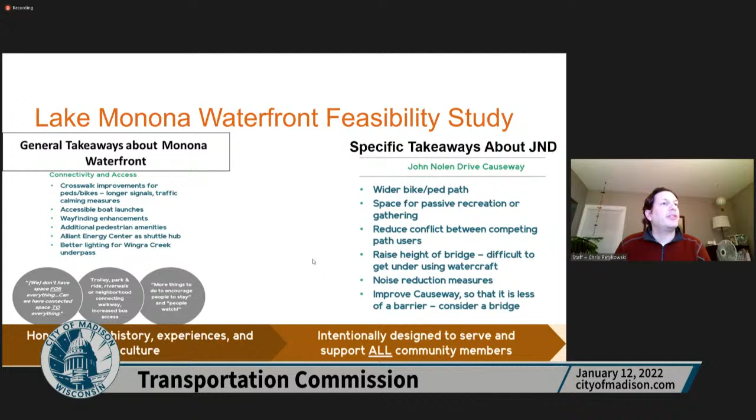That's all the presentation I had. Again, we're here early, and wanted to provide this overview of the project, see if there's anything, let you know some of the things I've been hearing already. Wondering if there's things you guys want us to keep in mind as we start to move forward and develop some alternatives to look at. And that's all I had for the presentation.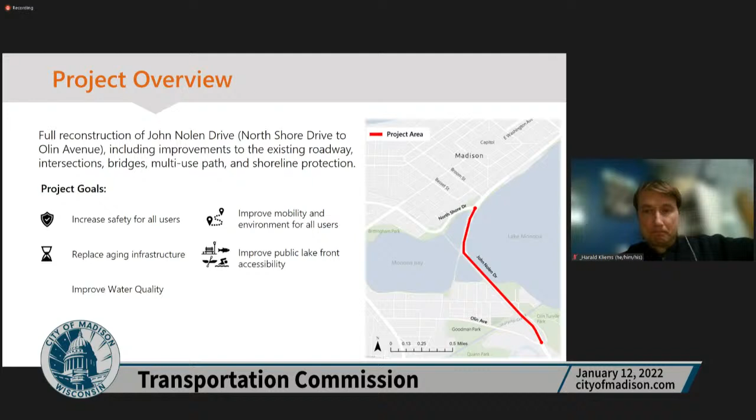Thanks. Thanks, Harald. Does anybody have any other comments or questions for Chris?

Okay, I'm not seeing any hands. You got a lot of good feedback there, Chris. Hopefully that's what you were looking for. Thank you. Okay, so let's move on to Odana Road then.

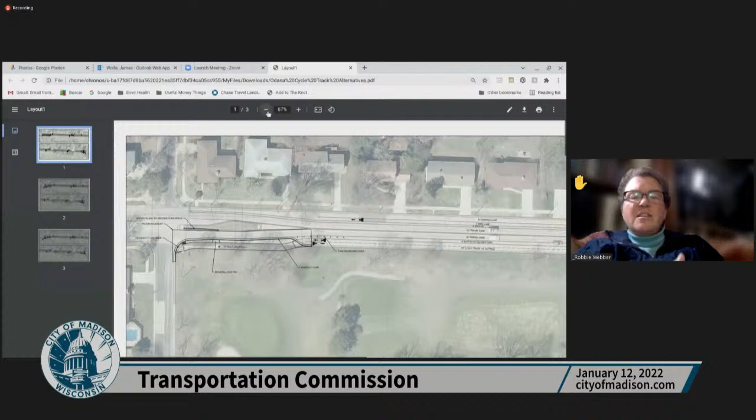But the mid-block one, are you planning on doing a pad that's out into the street? It would be like painted space on the street, street level at least at this point. So somebody would have to come down the curb cut, and it would be quite a bit below. That first step, if you're not using the ramp, if you're not on wheels getting on the bus, is already fairly high, and if you're at street level, that just makes it higher. So I was thinking about a raised pad that would be in the street.

That is something we could consider. At this point we're trying to do something fairly simple and inexpensive, because the input we received from Metro is that the bus stops along that stretch of Odana are likely going away with their route restructuring, so we didn't want to make a major investment if those would no longer be bus stops. I understand, I just thought this would be a great place to test drive a raised pad for bus stops. We did just install a floating bus stop on Bassett. Maybe I haven't noticed it, I haven't been taking the bus a lot in the last 2 years.

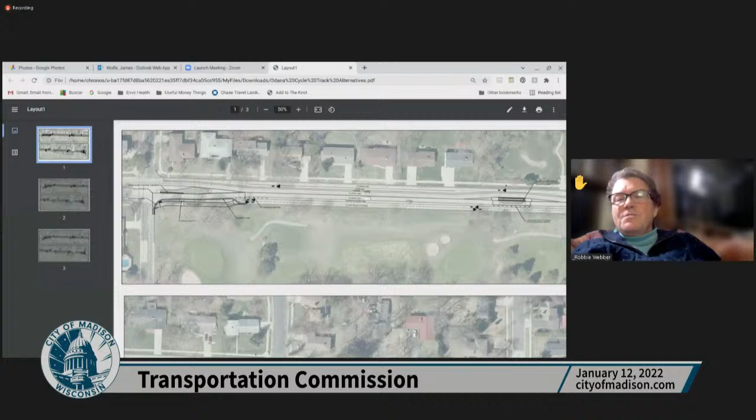Is that all you had, Robbie? Yes, I was just trying to figure out the bus bike lane issue. Let me ask about the mid-block bus stop: it looks like the path itself would be narrowed. How narrow would it be for two-way traffic?

It would be what we're showing as far as painting would go, painted at 7 feet with a 2-foot gutter. That's factoring in the 8 foot by 20, maybe 25 foot bus boarding area, so it'd be narrowed for about 30 feet or so. But 7 feet plus a 2-foot gutter is still enough for people to pass each other slowly, and watch out for transit passengers as well. Obviously, as the bus stop locations with the redesign are finalized, this could be changed.

It may not be needed, and it seems likely it won't be, so it wouldn't have to be narrowed. We're just trying to stay on top of that as well.

My other question was, I'm a little unclear - what is the buffer between the cycle track and car traffic? Is it paint, bollards, a curb, or what are you using to protect people from each other? What we're proposing here is paint with delineator posts, like on the parking-protected bike lane on Bassett.

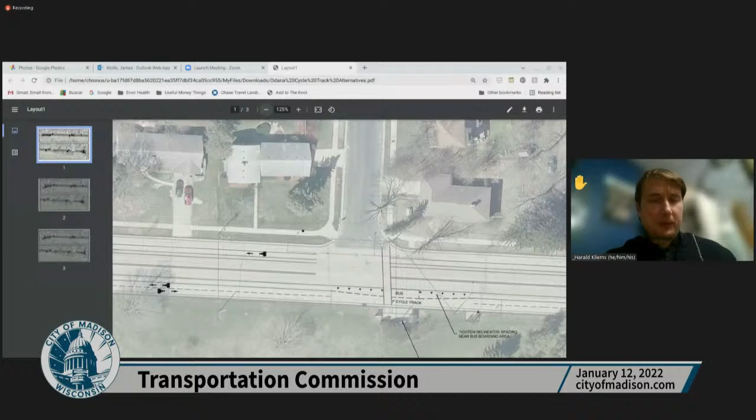Harald, you're next. Yeah, thanks. I'm happy to see this moving along. I know we talked about it early on when COVID hit, and this was one of the potential projects, so I'm glad to see it progressing. Maybe let me start with a higher level question - you said this is a project you're trying to do on the cheap and quickly, which is great. I think we need to take that opportunity, maybe learn something from it, and for now provide a safe bike facility for people.

But what's the medium to longer plan for Odana, both on this stretch and extending in both directions, if there is one?

Go ahead, Renee. I'm not sure that we've really taken a deep dive on Odana. With this section, the thinking is that at some point this would come up, but I don't know if it's a short-term, medium, or long-term project for Odana to actually come up as an engineering project. So that might impact, depending on how this goes, what we might think about doing on the rest of it. But at this point, we haven't really taken a close look at changes to the rest of Odana.

Okay, so I guess the idea is you build it so it's not super expensive, and whatever happens in the future is relatively easy and cheap to change because you're not moving much in terms of curbs. The reason I'm asking is we just installed the mostly buffered bike lanes on Odana west of Whitney Way, which now makes that a much more important connection. I personally don't use the West Beltline path as much anymore because of the bad crossing at Whitney Way, but also because now there's the option to just continue straight on Odana if that's your destination.

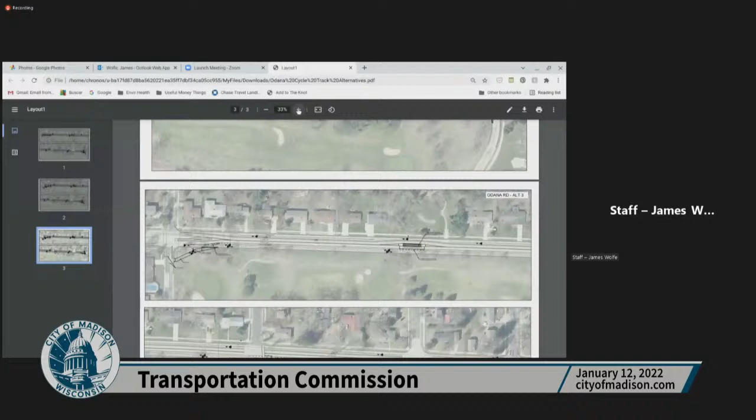Okay, maybe we can go to the other side. Yeah, and to really get a good grasp on those turning movements, we'd probably have to wait until good summer weather, to see how the golf course driveway gets used during peak season. Right, I guess Streetlight doesn't give you turning data just yet.

I think on this end, I don't like any of the options that have this off-street path. You highlighted some of the downside for people who come westbound on the protected bike lane but want to transition over to Odana, since there's a bike lane there for those who don't want to go through the neighborhood. That would be an awkward transition. Then, as you pointed out, the conflict with eastbound people coming onto Odana from two directions just seems to produce more conflict.

So I guess that's alternative one, that does not have those issues. Is that right? Yeah, where the paths meet the intersection closer to the intersection seems preferable to me. Excellent. I maybe didn't note this before, but of these alternatives, the staff preference here was this version as well, and then at the other end, it was the one that doesn't look as much like the semi-protected intersection, that had the extended island space where the existing island in the center of Odana remained.

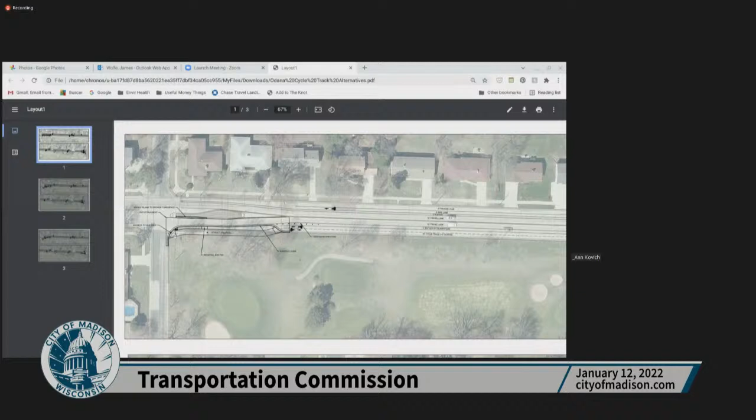Okay, I don't see any other hands up. Jim, did you get the feedback you need to stay on track with your timing? I think so, I guess. Did you get what you needed on the east end? It sounds like you did on the west end, but did you on the east end? Maybe not quite enough. I maybe just need more of a confirmation.

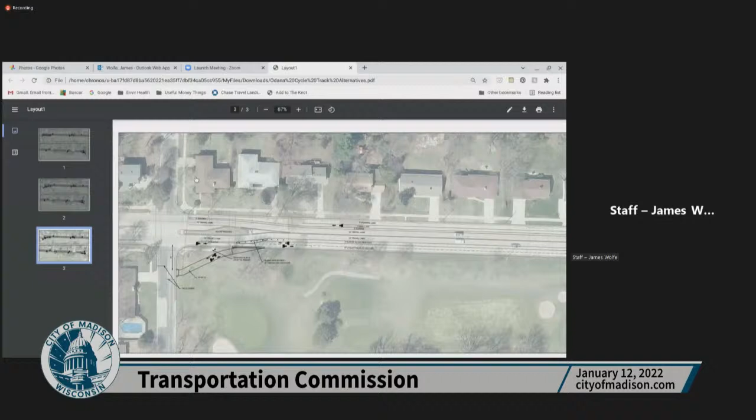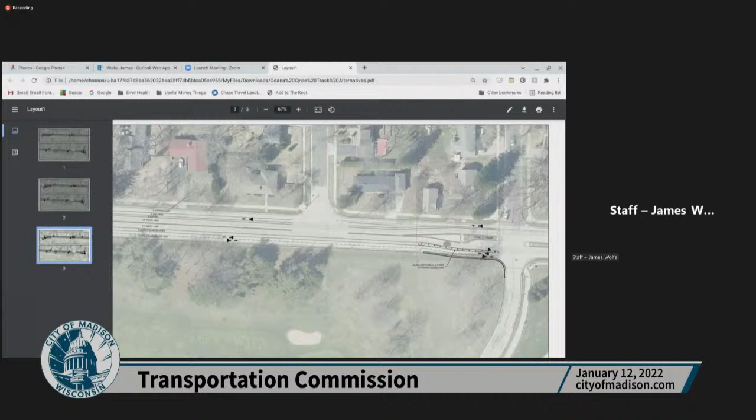It sounds like Harald would maybe like to know a little more about the movements here before. Can you show us what you recommend as staff? Yeah, which one do you recommend? I think this was our preference. It was a little more cost effective and maintained more typical operations with some of the turning movements and how the left turn lane was situated here, as opposed to removing the whole island and resurfacing all of this. If part of the intent is making this a retrofit, lower cost option, this was the way to go. Does that address your concerns, Harald?

Yeah, I mean, I don't have a super good sense whether one design is superior to the other, to be honest. And so lower cost seems a reasonable thing to do. I don't think it would be vastly less safe unless we know there's so much traffic turning that it produces conflict.

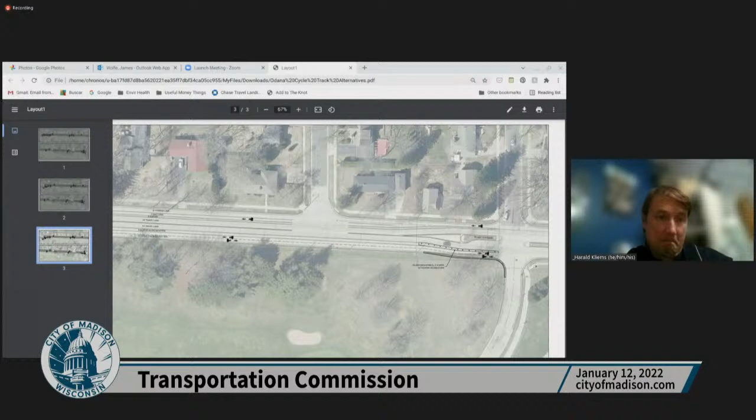Yeah, and I think Jim and I can reach out. Obviously getting those turn movements - people will be there if it snows, there'll be users, but it's probably not the same as golf season. So we might be able to get a little information from the Parks Department on their typical day versus a high golf day. But I don't know if Streetlight - we can check, but I doubt they would tell us how people turn into the golf course. Might be a little too much.

Right. Are you thinking about green paint through the intersection, presumably? Maybe? Probably, yeah. I think we would be able to do that. Even if we decide in the long term that this has problems, or we've replaced it with something better, green paint isn't forever, so.

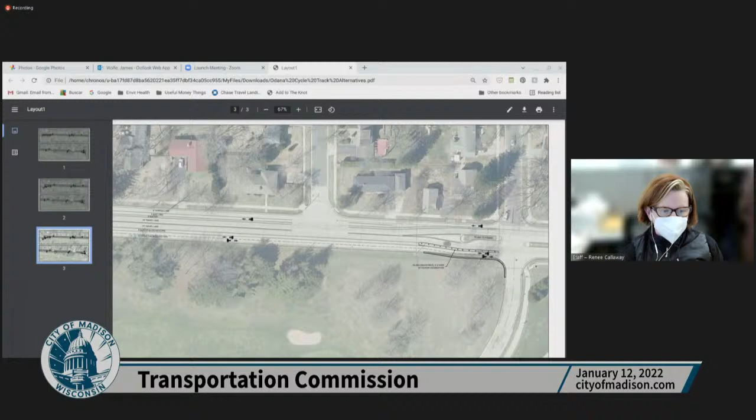Okay, anybody have any other comments? Lots of great feedback this evening. Okay, thanks Jim. So that was a great long discussion on the projects, and it looks like we'll be seeing several of them back again.

Okay, next we have item number 10, which is a report back from the TPPB members as to what's been going on over there. Chris and Alder Harrington McKinney, your thoughts? There was a TPPB meeting this Monday, the first one since we last met. It was a short agenda, but for folks interested, we reviewed the list of projects that the city is going to submit for the state's active transportation funds.

We reviewed the Greater East Towne area plan, which included some transit-oriented development and street connections and bike and pedestrian connections around what is now the mall. And we saw the most recent version of the Vision Zero action plan, which included the network that we saw tonight, in addition to some action items.